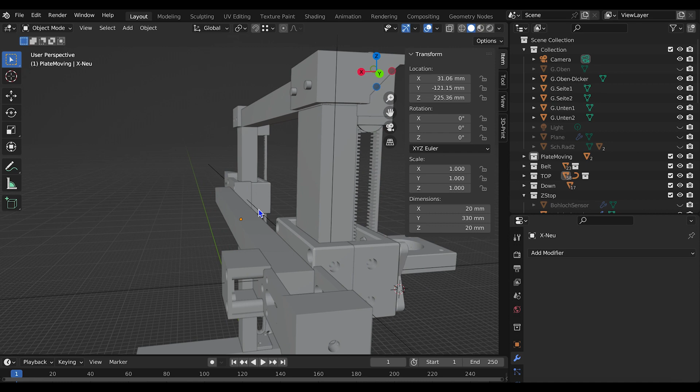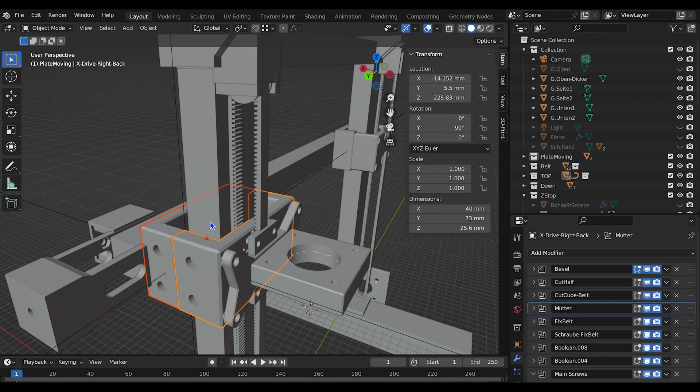You see here the two belts, and you also see how the belt is fixed here. And these are the new parts. These are the two U-shaped parts in order to hold each side of the axis, which is here, as well as the rail slider, which is in here, which you don't see right now.

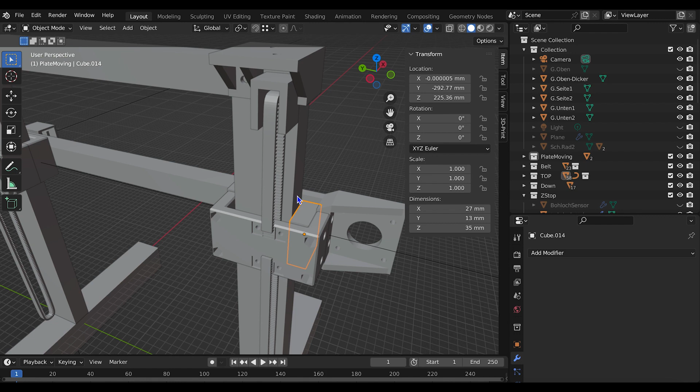And here you see the slider, yes. On this side, so this is a setup. The slider is not exactly the height, but this is just the height of the rail and the slider. I just did this in order to construct those parts in the right way.

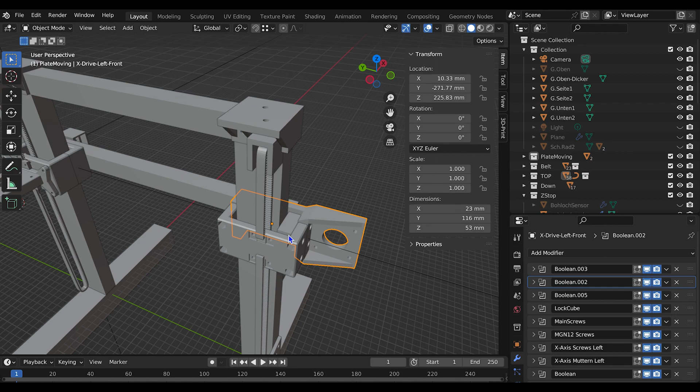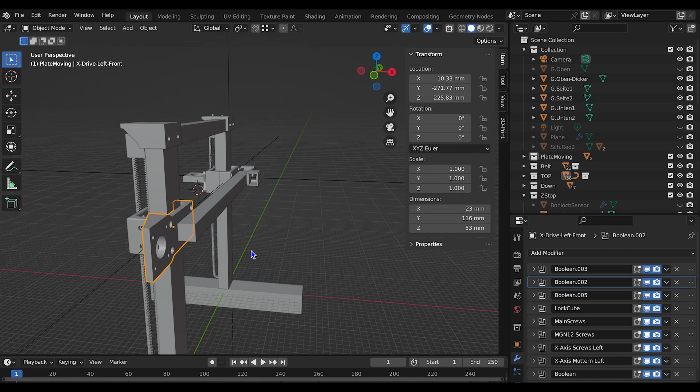And now what I also changed from my old design: as you saw on the old design, the motors are on both sides. So I thought maybe it's better to balance it a little bit. I keep my Bowden extruder, as I mentioned before, and I changed the motor of the X-axis drive to the other side of the X-axis to have it more balanced, to have on one side the Bowden extruder motor and on the other side the X-axis drive motor. I thought it's maybe better to do it like this.

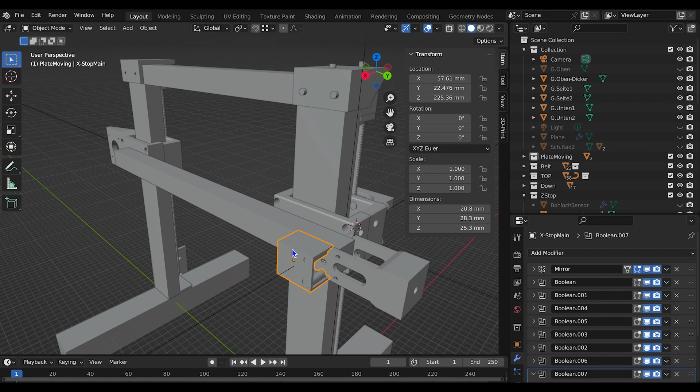So in order to do it like this, I also need to change the whole tensioner and stop for the X-axis. This is a new stop. This is my new tensioner. And I have printed those parts, and beside here you see this is the Bowden extruder motor holder. The design is done in a way that this extruder can also go to, now it only moves this part, but just to show you, it can also go to the right side.

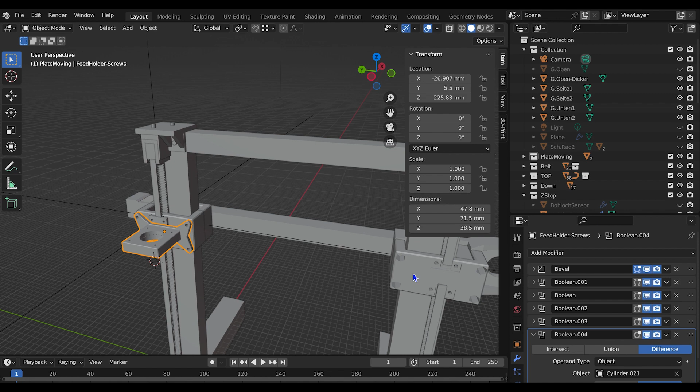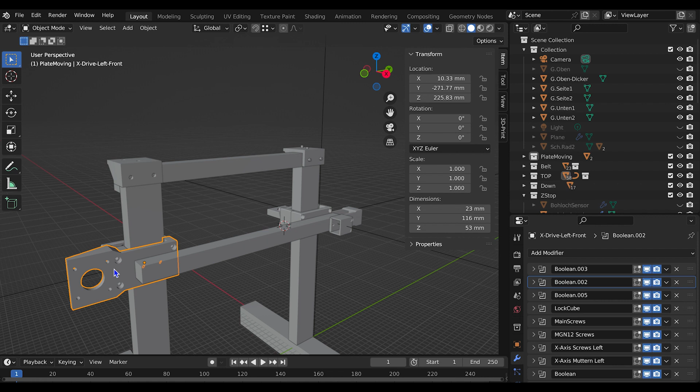If you want to keep both motors on one side, you can easily do that without changing anything in the design. Or if you want to turn it around, maybe your intake for the filament is on the other side of your printer, you can easily flip this thing around. I did this actually, so this is not showing my original. I designed it like this, yes, but it's flippable, so I have put it in a way that this part is 180 degrees flipped on the other side, and these parts are flipped to this side.

By the way, you also see here the Z-axis double belt drive. Thank you to Kevin Akasam, how to speak that. But thank you very much. I really love that people bring those ideas up. For example, I watch those videos, and many people do, and we get maybe other ideas, have some small things to change. So I made it a bit simpler. I thought, okay, maybe we just take 2 belts, we don't do anything on top, and we drive them directly in the same way as we drive the Y and the X belt. I also drive the Z belts in the same way.

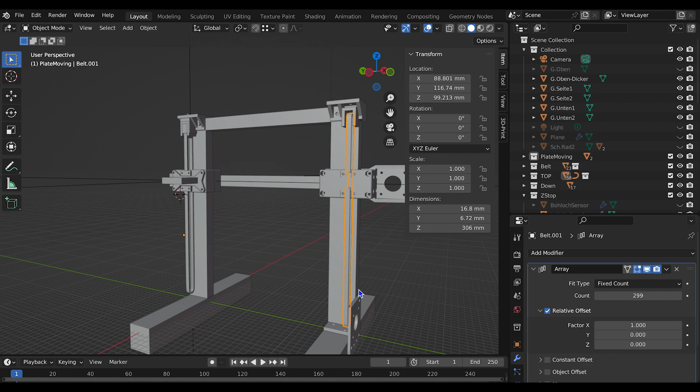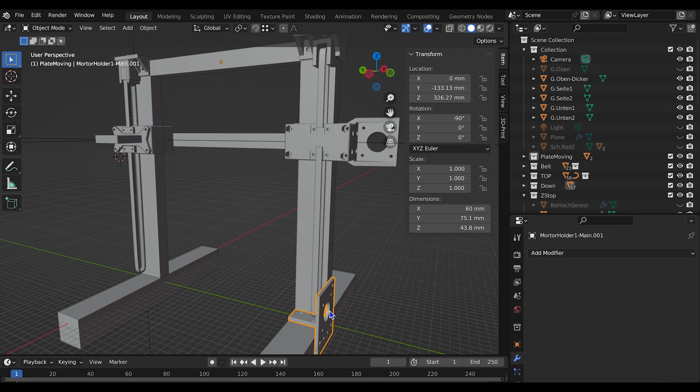So I have constructed here a motor holder, which is a very simple plate. I think actually you don't need to print this part. I think this plate would be stable enough. But I just printed it with this. It doesn't really add stability because this plate is pressing against an L-shaped profile, so this is fully okay. And here comes the motor in.

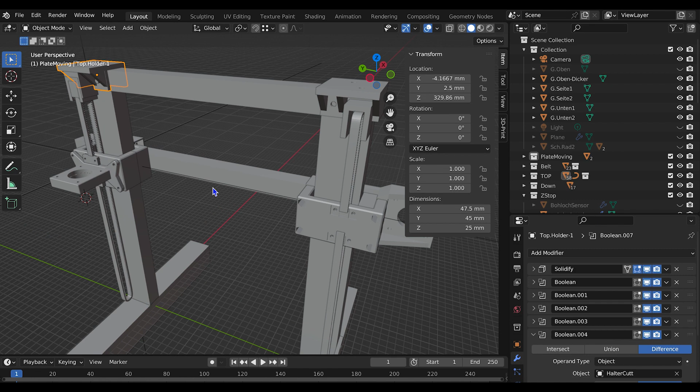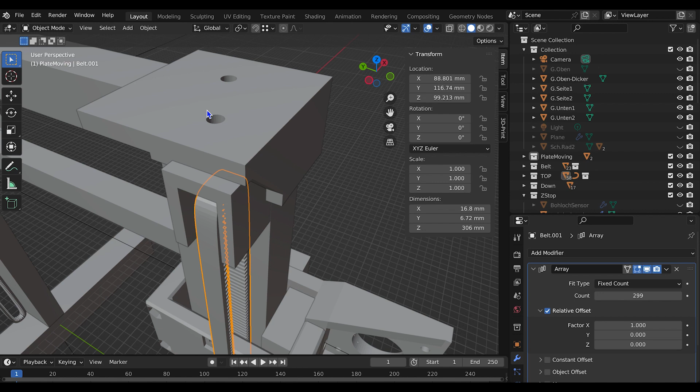And here on top I have designed 2 top holders which hold the existing tensioner of the Ender3, which in the original design is used for the Y-axis and the X-axis. So the inner part I just installed here on those holders, which I print. And then I add here two clips which are screwed in here, 1 and 2, and those clips hold my Z belt, and here on top I have the screw from the tensioner of the Y and X drive, so those screws can be manually used to tension both sides of the drive.

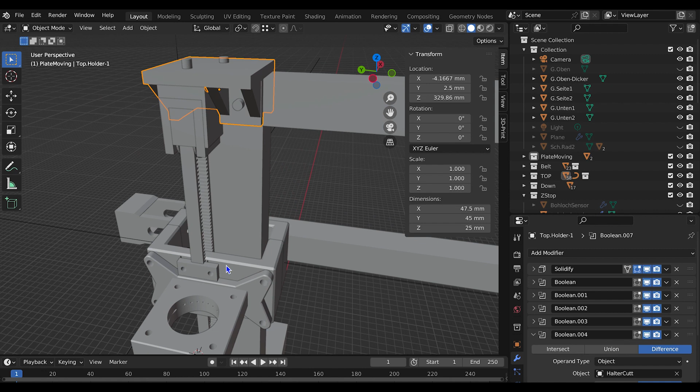So it's a very simple design. There are only those 4 parts required. Each side has 2 parts, and of course now with my new design for holding the X-axis, here are those clamps. These parts are holding the belt directly. So let's get it installed.

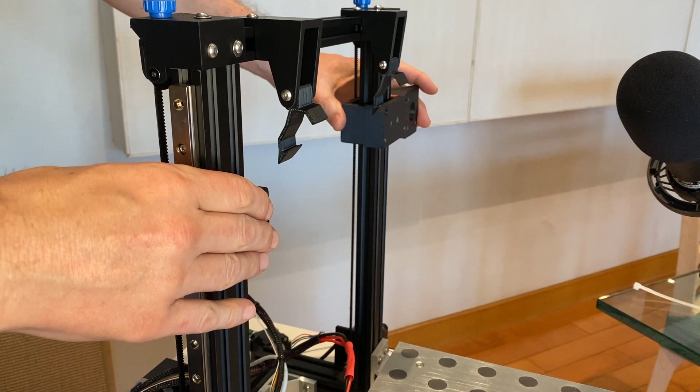So I have installed these sides here, left and right. Here is where my X-axis motor will be. On this side will be my Bowden extruder motor. So now I show you around on the other side.

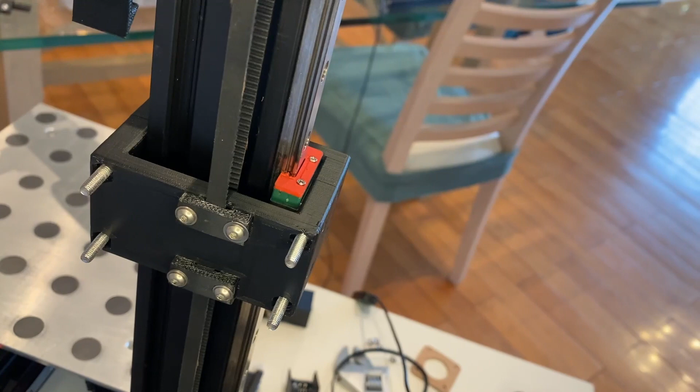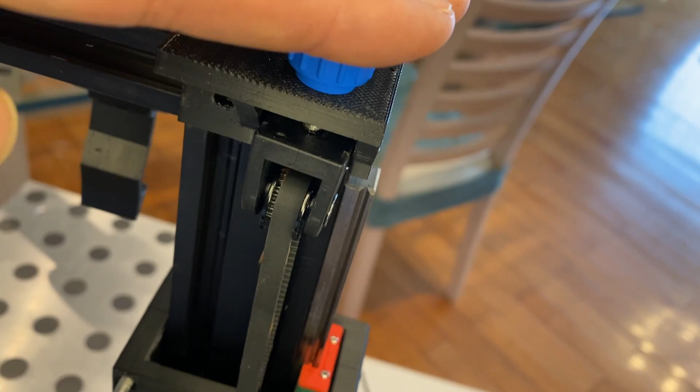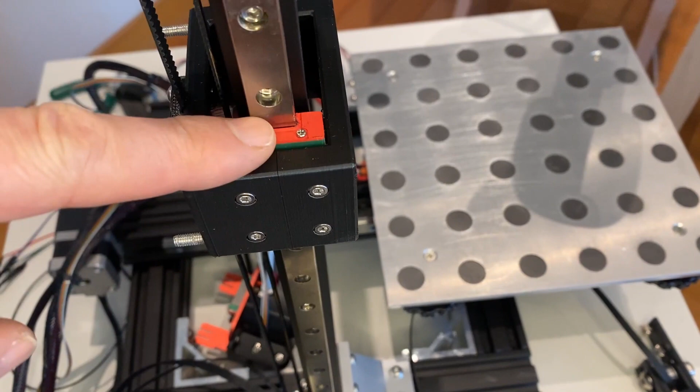So this is where I fixed the Z belt drive. This is very simple. These are all printed parts, and here on top you see the original Ender 3 tensioner, and here on the bottom you see this motor holder. Now here is a slider. We have those 4 screws connected to the slider, and these big parts are 2 sides, a kind of U shape, and I connect them with these bigger screws. The screws are longer here because I need to attach the motor for the extruder.

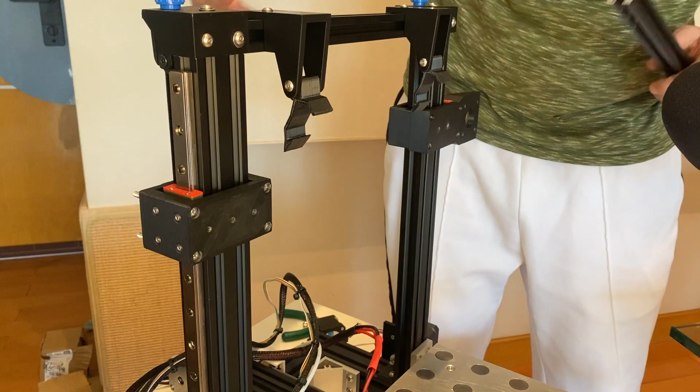Let's get the X-axis attached. Oh, by the way, because I'm not using a separate motor driver, I'm still using the board where both Z motors are connected. It's not an optimum solution, but you see something cool here. There is no connection here between those. When I remove the connector of one motor, I can easily slide this up and down, but when I connect the other motor together, magic! The energy gets transmitted to the other motor, it moves both down. It needs a little bit of force, but it's pretty good.

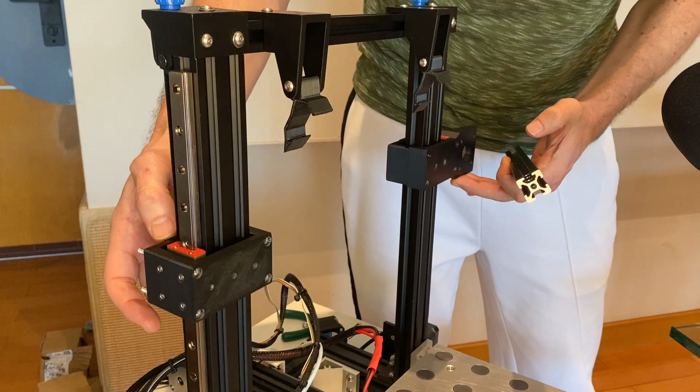So now the idea is, you see that to install this axis, everything is installed from the outside. So I don't need to have screws from the backside, which was the original design, and I did not like that kind of design. So let's get this fixed.

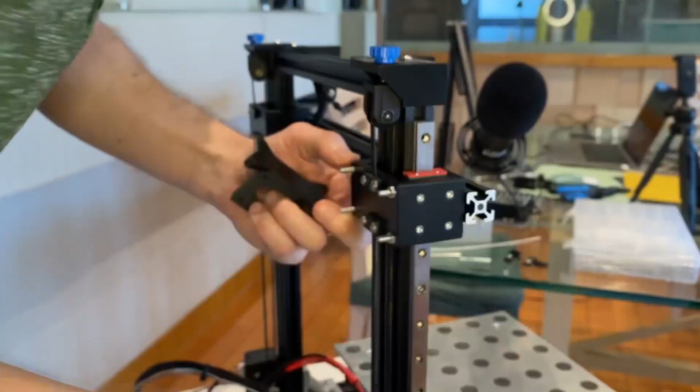I also want to have it straight to this one, as these hanging mechanisms are very accurate as they are printed. I just hang this in and I balance it with a little bit of force, and then I can nicely screw this together. So this is fixed. Now I'm going to add my extruder part. I'm going to put some distance nuts here in between. And then I'm going to add my motor holder, and then I add the top nuts here.

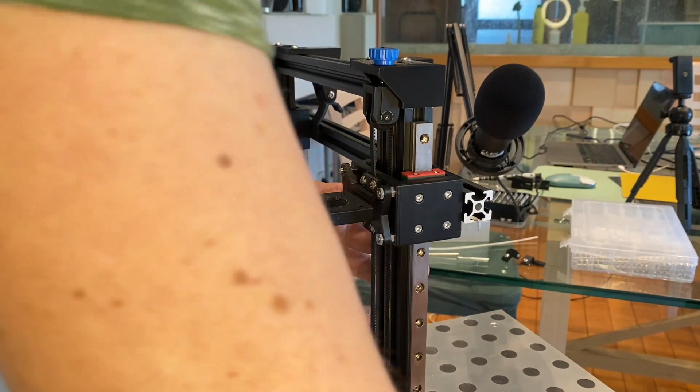Actually, I try to keep the design very simple. I will put everything on my webpage. You can find all of the required screw lengths and the required parts, and of course the print files.

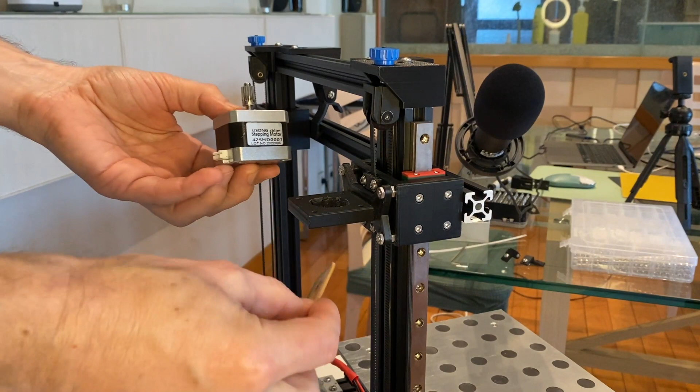So we screw a little bit, it's fine. I know I should use another tool, but I have this now on hand. It's okay, I can manage that. But I'm anyway going to add my damper here. This is fine. I'm going to put the connector to this side because you have a little bit of material falling down from here, because the filament is coming from this side. So it's better to have these connections to the other side.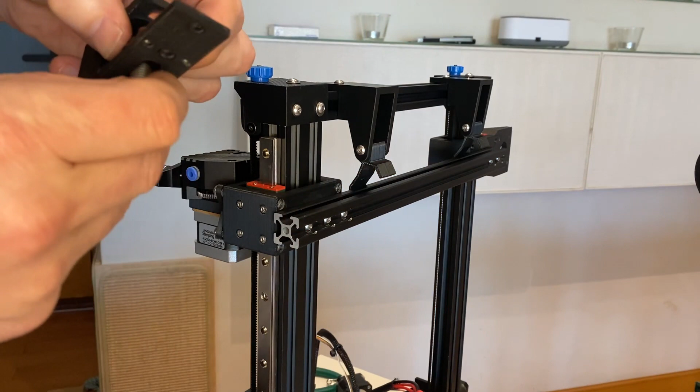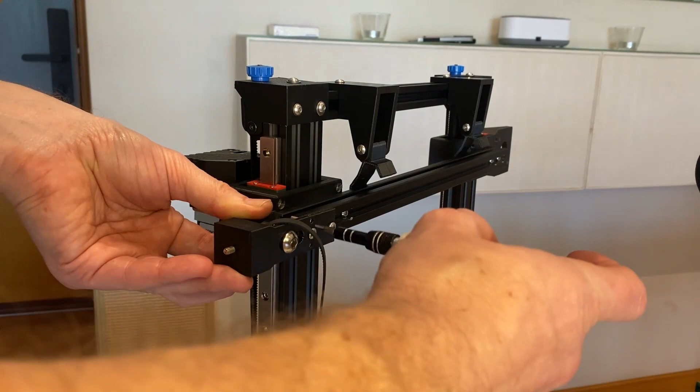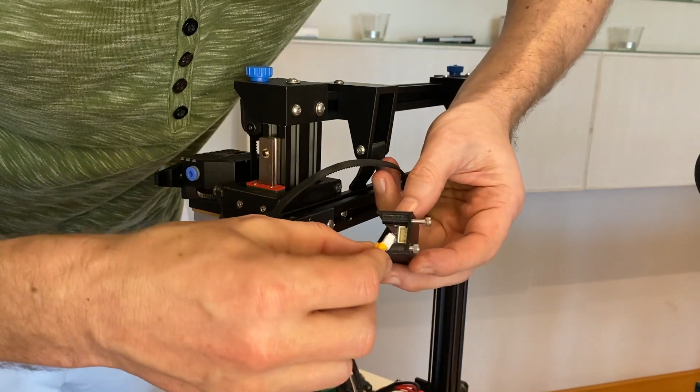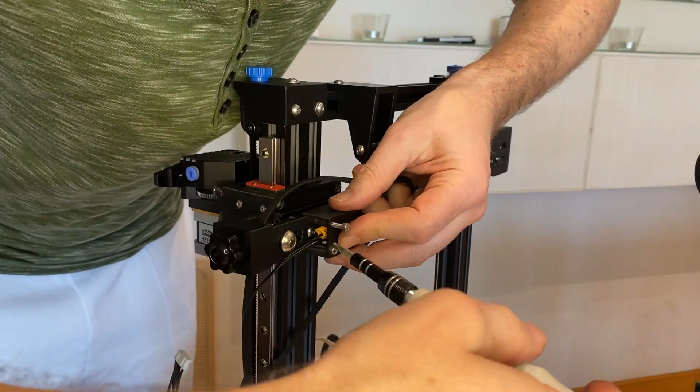So this part is finished. This is my new end stop, it's going to sit here. And the distance ring, I can center it a little. So put it through. Screw this a little, and then I need to have my new X stop put here on top. Maybe I connect it first. Something like this, and it goes here. So now we are getting the motor back for the X-axis.

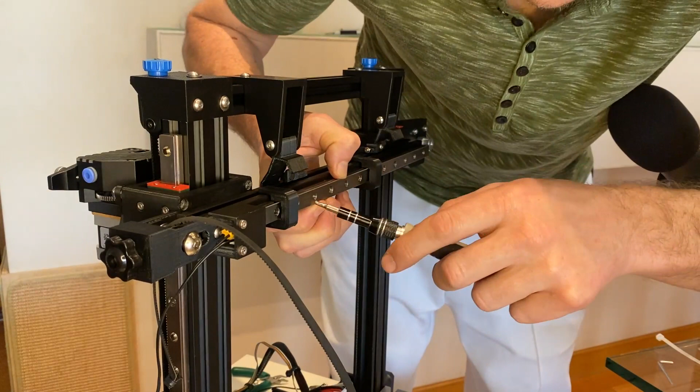So now we are putting the rail in. This is the first. I want to align this nicely. So, good. Now I'm going to center this. Okay. Now we are adding the missing part.

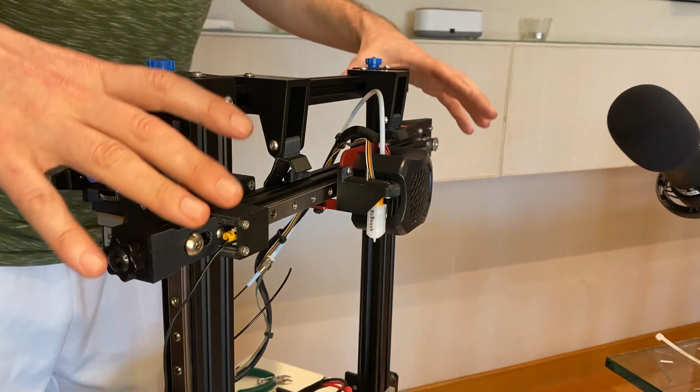So this is my change. I will do some printing and give you some feedback on this, but I think it's pretty cool. This was the re-engineered version of my X-axis.

Now I'd like to give you quick information about why 2 weeks ago my design did not work. First of all, my original design, as I showed you before, was bending a little bit, so this was not very useful. But I had another issue because I use 2 motors for the belt drive, one left, one right, and they are driven by the same driver. The board I'm using doesn't have separate drivers for the Z-axis motors, which is not necessarily a bad thing, but I also wouldn't say it's a very good thing.

How can I describe that? I think it would be better to separate it, and I'm working on this. But I don't want to buy a new board right away, so I think I keep this for now and see where it goes. I mean, look, I'm printing these kind of things in ABS, and my results are really, really good. Yeah.